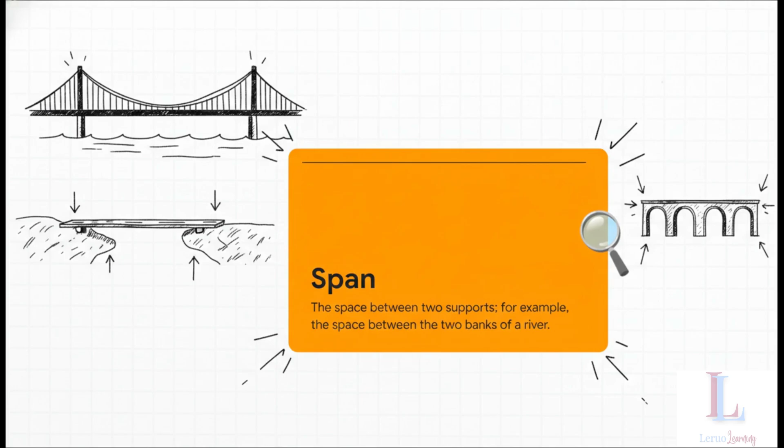Okay, so how do they do it? Well, you can think of engineers as having this incredible toolkit, a set of basic fundamental pieces that they can combine in all sorts of clever ways to build pretty much anything you can imagine. Let's open up that toolbox and see what's inside. And here they are. These are the three heroes of our story: the beam, the arch, and the cantilever. It's wild, but almost every single structure you see is really just a smart combination of these three basic parts.

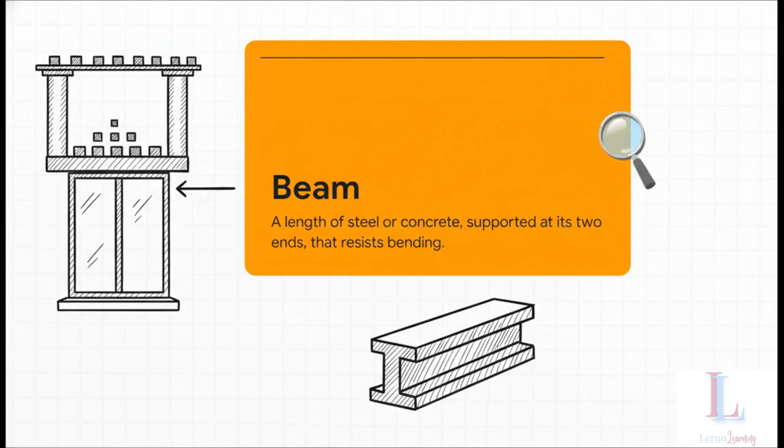Let's start with the one you see everywhere: the beam. It's really just a length of stuff, like steel or concrete, that's held up at both ends. You see that solid piece running across the top of a window or a door? That's a beam. Its whole job is to take the weight of the wall above it and carry it safely over to the sides, so the window frame doesn't get crushed.

But of course, engineers didn't just stop with a simple rectangle. They figured out that for any beam, most of the stress, the real work, is happening at the very top and the very bottom. So they cleverly put most of the material right where it's needed most and took it out of the middle. And boom, you get the I-beam. This shape is ridiculously strong but also lightweight, and it's basically the steel skeleton for tons of modern buildings.

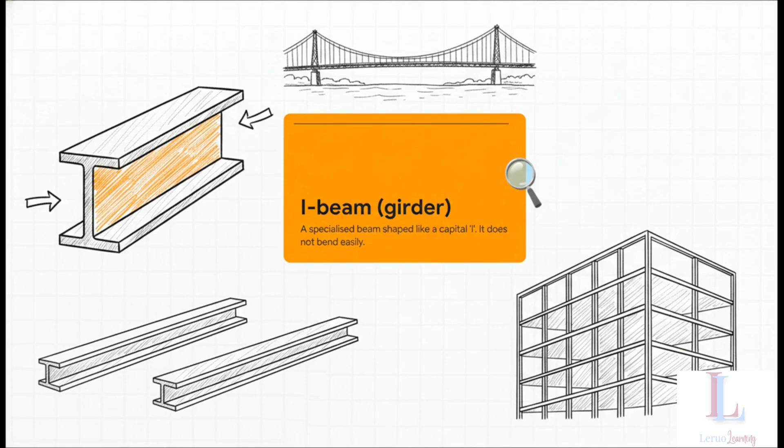All right, next up, the arch. The absolute genius of the arch is how it deals with weight. Instead of just trying to resist bending, an arch takes that downward force of gravity and transforms it. It turns it into a sideways pushing force called compression, and it channels all that weight down and out into its foundations. That's exactly why ancient Roman aqueducts are still standing after thousands of years.

And our final tool is the cantilever. The perfect way to picture this one? A diving board. It's basically a beam that's only attached at one end, while the other end just hangs out there in space. Once you know what a cantilever is, I promise you're going to see them everywhere, from balconies on buildings to the wings on an airplane.

Okay, so we've got our basic toolkit: beams, arches, and cantilevers. Now, let's see what happens when engineers start combining them on a massive, massive scale to create some truly stunning structures, like the world's longest bridges. Two of the most incredible bridge designs out there are suspension and cable-stayed bridges.

Now, they might look kind of similar at first glance, but they work in totally different ways. On a suspension bridge, you've got these two gigantic main cables draped between towers, and then smaller cables hang down from those to hold up the road. But on a cable-stayed bridge, each cable runs in a straight line directly from the tower down to the bridge deck, creating that beautiful fan-like pattern.

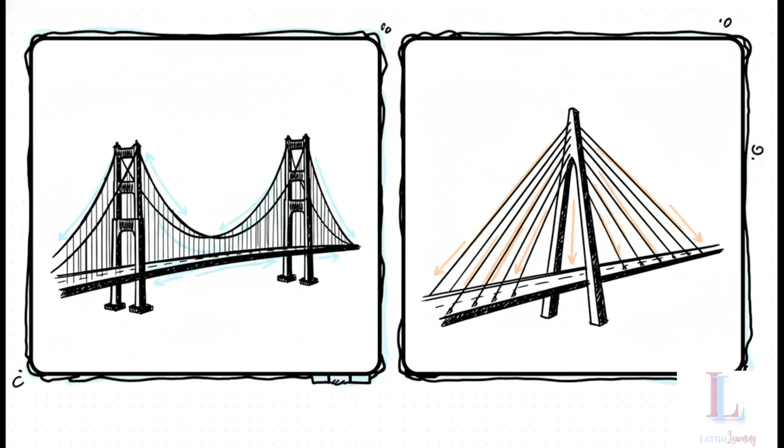And just to give you a sense of what's possible here, look at this number: 1,990 meters. That's over a mile. That is the length of the main span of the Akashi Kaikyo Bridge in Japan. It's the longest suspension bridge on Earth, and it's just an unbelievable example of what happens when you master these principles.

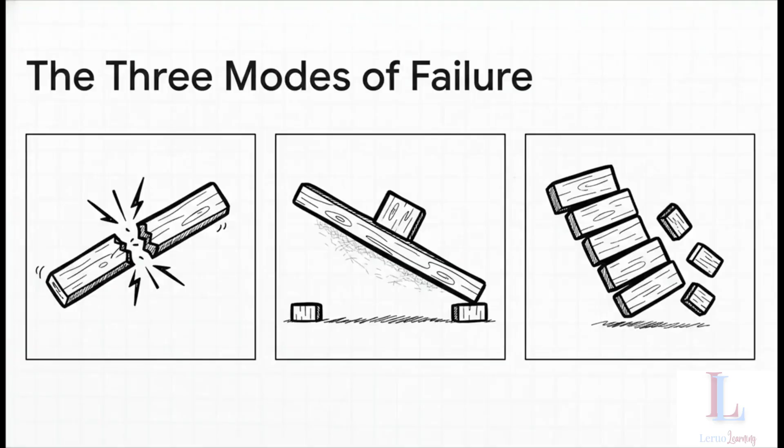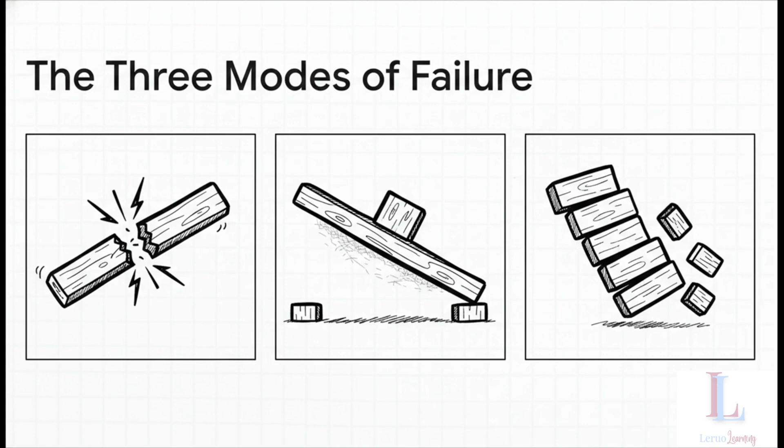But here's the thing: building things up is only half the battle. To be a truly great engineer, you have to be just as obsessed with how things fall down. You have to know the enemy. And it turns out that enemy really only has three main moves. A structure can fail by fracturing, by bending, or by toppling over. Every single structural design is basically a defense plan against these three threats.

First, let's talk about fracture. This one is a failure of pure strength. The easiest way to think about it is snapping a pencil. You apply too much force, the material just can't take it, and snap, it breaks. That's a fracture. It happens when the load on a structure is more than the material itself can handle.

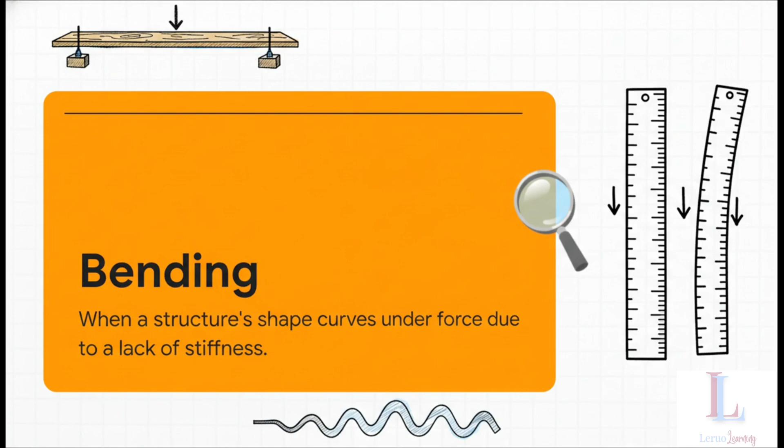Next up is bending. Now, this isn't about strength. It's about stiffness, or rigidity. The material doesn't actually break, but it changes shape too much when you put a load on it. Think about a flimsy plastic ruler. It bends super easily because it has very little stiffness, and in a big structure, that can lead to all sorts of problems.

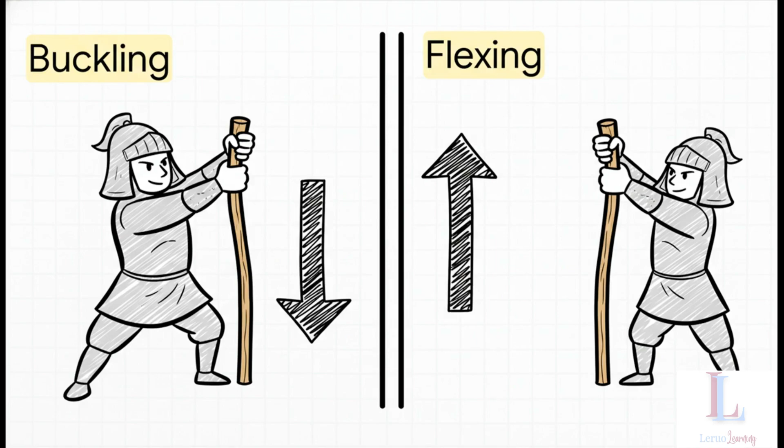So, bending itself can happen in a couple of ways. When you take something long and thin, like a drinking straw, and you push down on it, see how it bows outwards? That's called buckling. It's bending under compression. Now, if you were to pull on something and it bends, that's called flexing. Engineers have to plan for both.

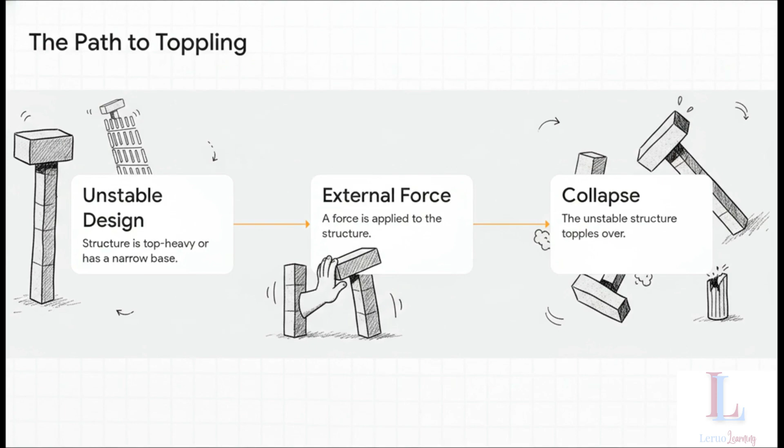And finally, there's toppling. This failure has nothing to do with how strong or stiff the material is. This is all about stability. It happens when a structure is top-heavy or if its base is just too narrow. A little push from the side that a stable object would just shrug off could be enough to make an unstable one tip right over.

So, when you put these two sides of the coin together, the toolkit for building things up and all the knowledge about what makes them fall down, you finally get to the very heart and soul of structural engineering, the science of stability. The core principle is actually pretty simple, but it's also incredibly profound. The ultimate test of any structure isn't just, can we build it? It's, can it stand up to every force that's going to be thrown at it over its entire lifetime?

And that right there is the key takeaway. The best engineering isn't just about going bigger or higher. It's about having this deep, almost obsessive understanding of how things can fail, whether it's by fracture, bending, or toppling, and then designing every single piece to prevent that from happening. It's a constant, calculated fight against the forces of nature.

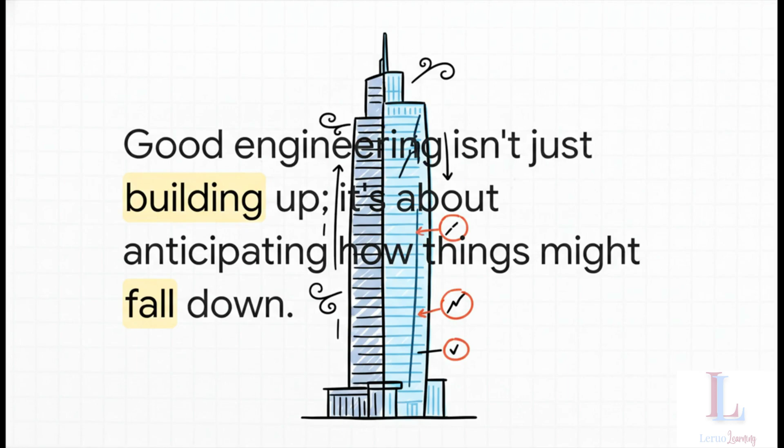So, the next time you're out and about, I want you to take a closer look at the world around you. Try to spot the beams, the arches, the cantilevers. Think about those invisible forces they're fighting off every single moment. Now that you know the rules of the game, what structure in your world seems the most impressive?